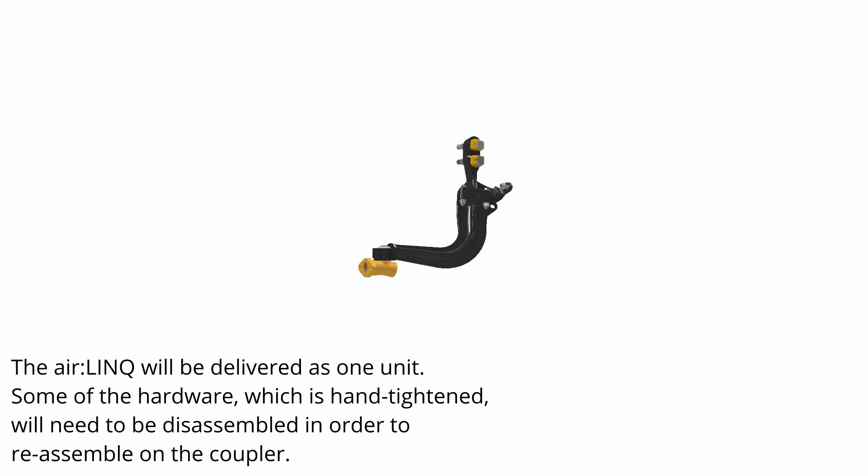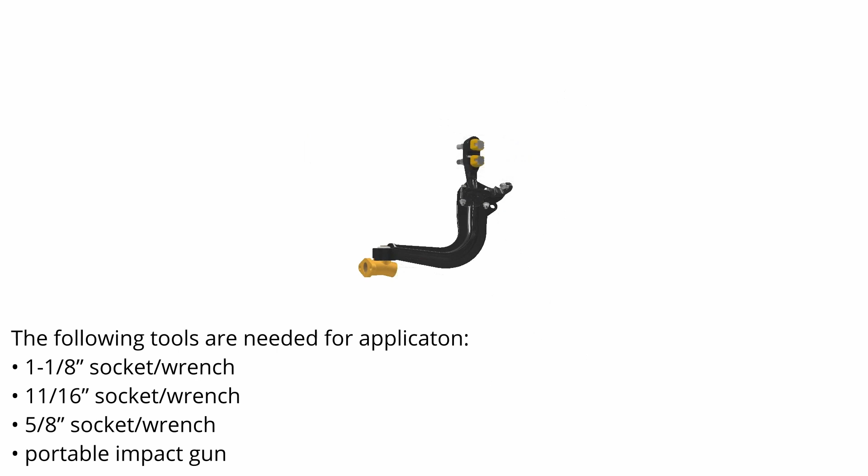The following tools are needed for application: a 1 1/8 inch socket wrench, an 11/16 inch socket wrench, a 5/8 inch socket wrench, and a portable impact gun.

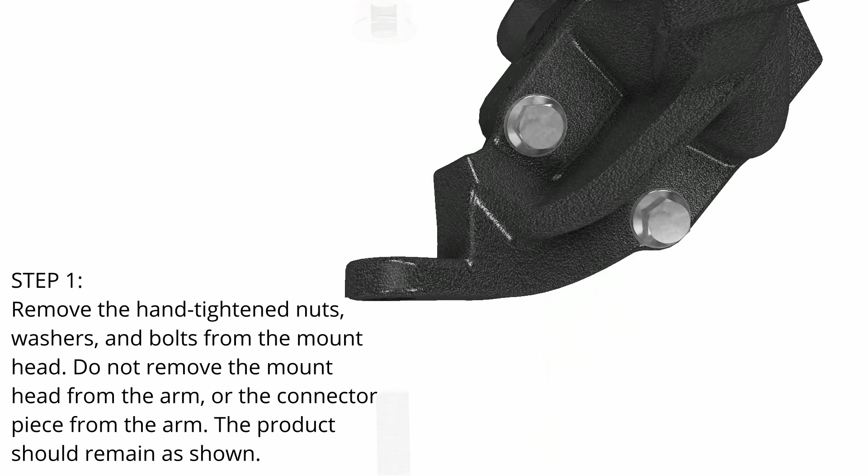Step 1. Remove the hand-tightened nuts, washers, and bolts from the mount head. Do not remove the mount head from the arm or the connector piece from the arm. The product should remain as shown.

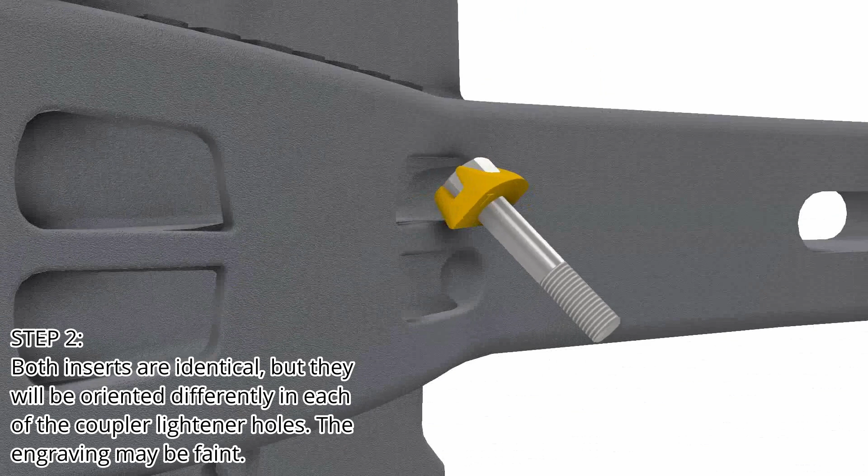Step 2. Both inserts are identical, but they will be oriented differently in each of their coupler lightener holes. The engraving may be faint. The insert should be put on the top lightener hole only in this orientation.

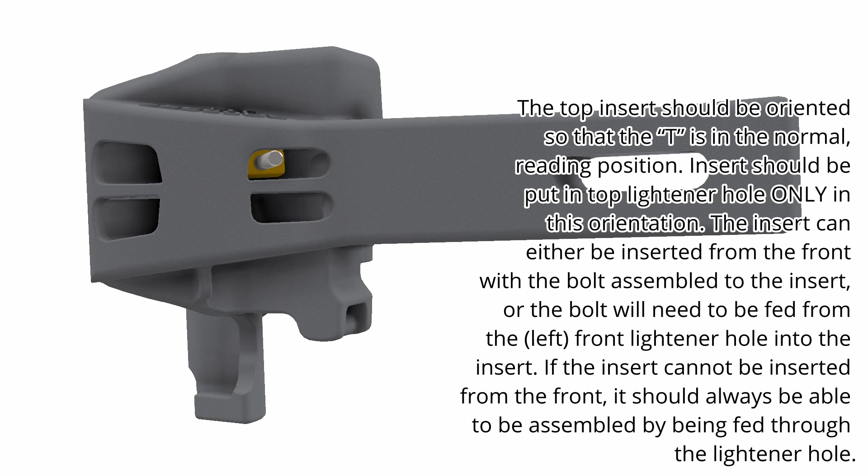The insert can either be inserted from the front with the bolt assembled to the insert, or the bolt will need to be fed from the left front lightener hole into the insert. If the insert cannot be inserted from the front, it should always be able to be assembled by being fed through the lightener hole.

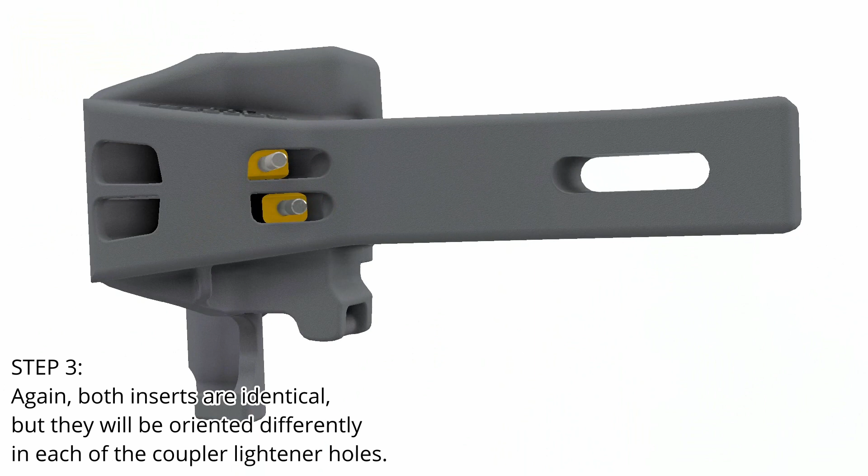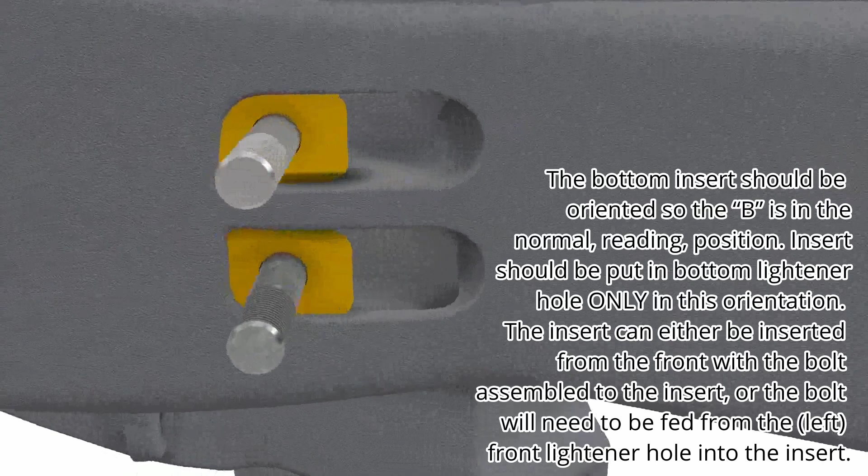Step 3. Again, both inserts are identical, but they will need to be oriented differently in each of the coupler lightener holes. If the insert cannot be inserted from the front, it should always be able to be assembled by being fed through the lightener hole. The bottom insert should be oriented so that the B is in the normal reading position.

The insert should be put in the bottom lightener hole only in this orientation. The insert can either be inserted from the front with the bolt assembled to the insert, or the bolt will need to be fed from the left front lightener hole into the insert.

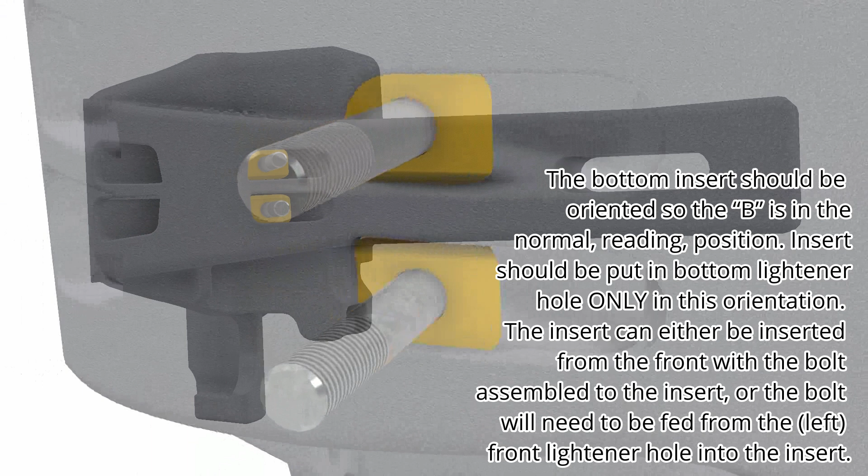Step 4. Make sure the inserts are taut and that they are grabbing on the inside lip of the lightener holes when the end of the bolt is pulled towards you.

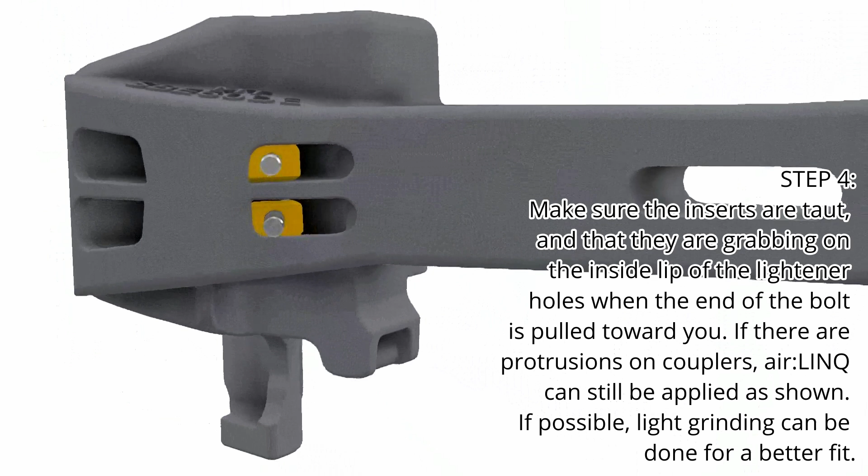If there are protrusions on couplers, air:LINQ can still be applied as shown. If possible, light grinding can be done for a better fit.

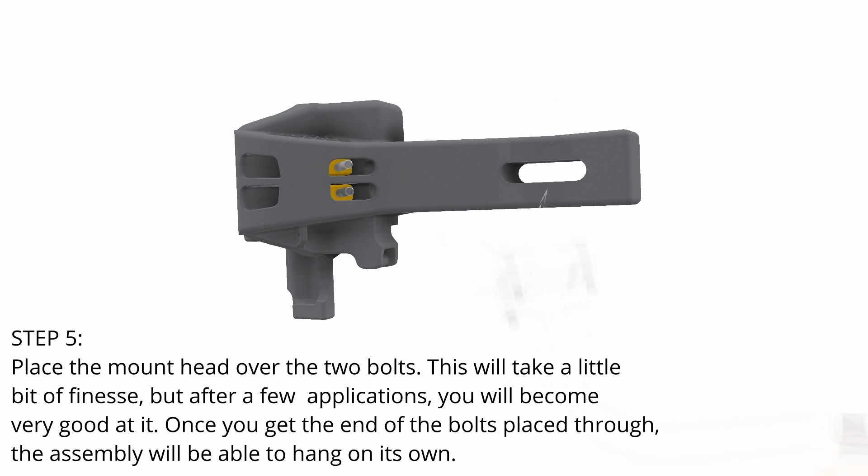Step 5. Place the mount head over the two bolts. This will take a little bit of finesse, but after a few applications, you will become very good at it. Once you get the end of the bolts placed through, the assembly will be able to hang on its own.

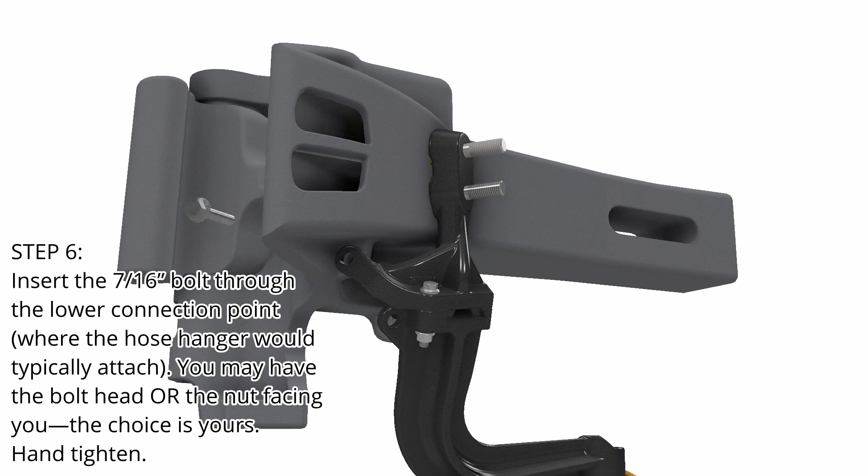Step 6. Insert the 7/16 bolt through the lower connection point where the hose hanger would typically attach. You may have the bolt head or the nut facing you. The choice is yours. Hand tighten.

Step 7. Place the 3/4 inch washers over the bolts and then loosely tighten the mount head nuts so that the mount head is contacting the coupler. The nuts are lock nuts.

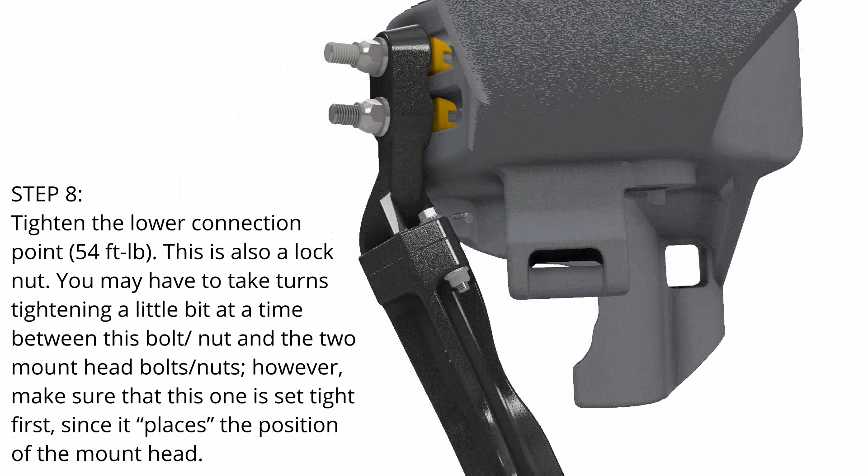Step 8. Tighten the lower connection point to 54 foot-pounds. This is also a lock nut. You may have to take turns tightening a little bit at a time between this bolt and nut and the two mount head bolts and nuts. However, make sure that this one is set tight first, since it places the position of the mount head.

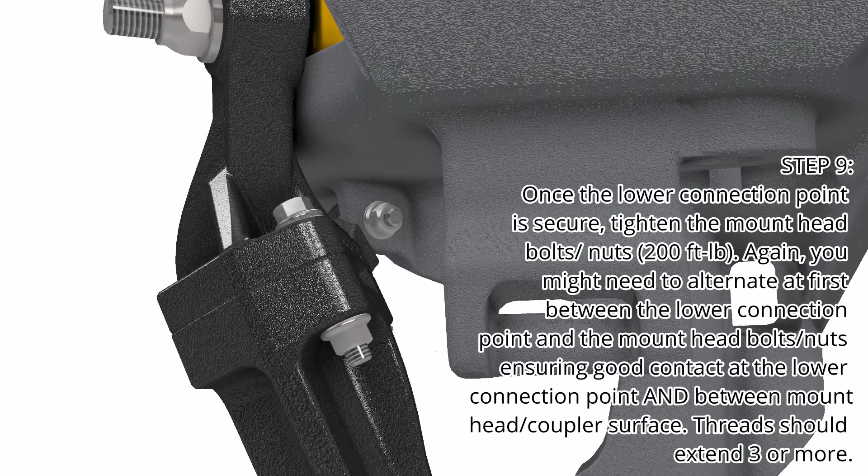Step 9. Once the lower connection point is secure, tighten the mount head bolts and nuts to 200 foot-pounds. Again, you might need to alternate at first between the lower connection point and the mount head bolts and nuts, ensuring good contact at the lower connection point and between the mount head coupler surface. Threads should extend 3 or more.

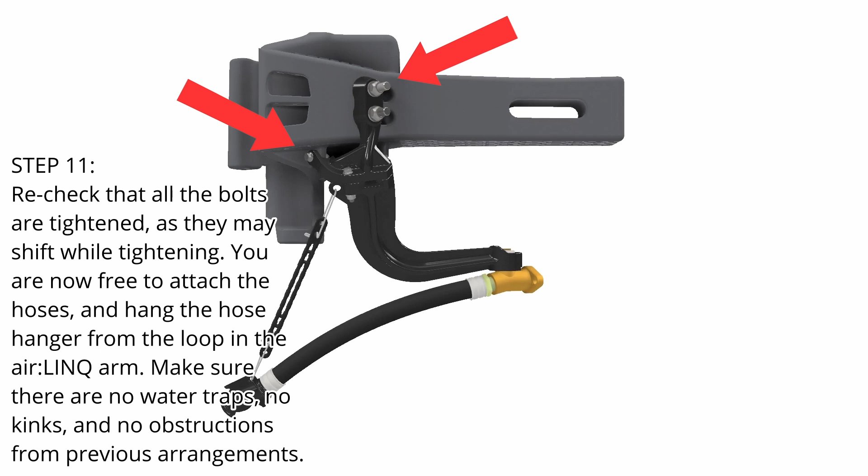Step 10. Be sure the contact at the lower connection point and between mount head and coupler surface is as shown. Step 11. Recheck that all the bolts are tightened, as they may shift while tightening.

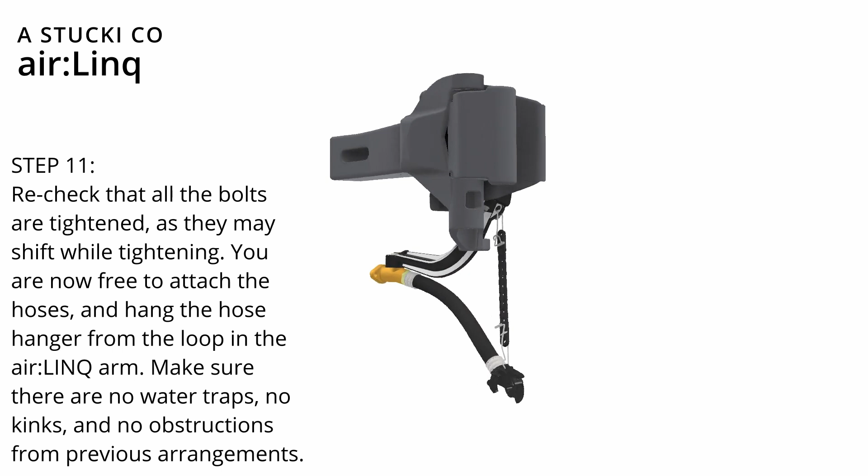You are now free to attach the hoses and hang the hose hanger from the loop in the air:LINQ arm. Make sure there are no water traps, no kinks, and no obstructions from previous arrangements.